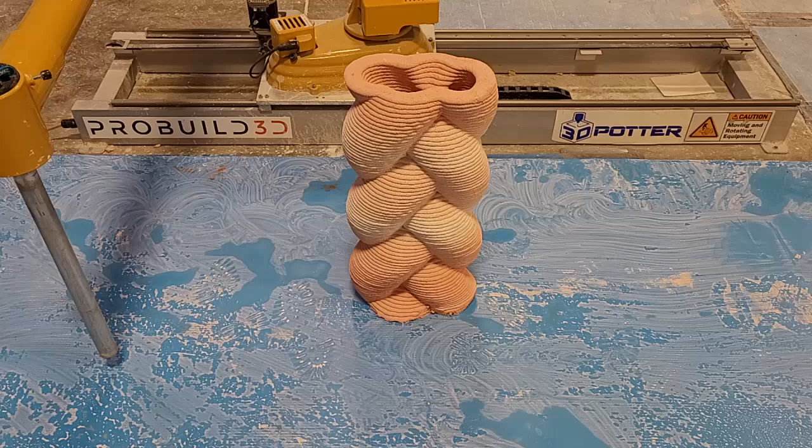Hello. In this video, we will cover how to use starting and ending scripts, as well as pause scripts.

Starting and ending scripts are added in your G-code file, which is made and set by your slicing software, such as Simplify 3D or Cura. Most slicers have the command G28 in the starting script. G28 is the home all command. When this command is run on 3D Potter SCARA printers, the printer will make a 360-degree rotation spin.

If you have hoses or other equipment attached to the printer, this may not be desired behavior. The solution is to remove G28 from your starting script. This will have the printer start the print file right away and not perform a home all maneuver. However, the printer still must be homed before the print file is started.

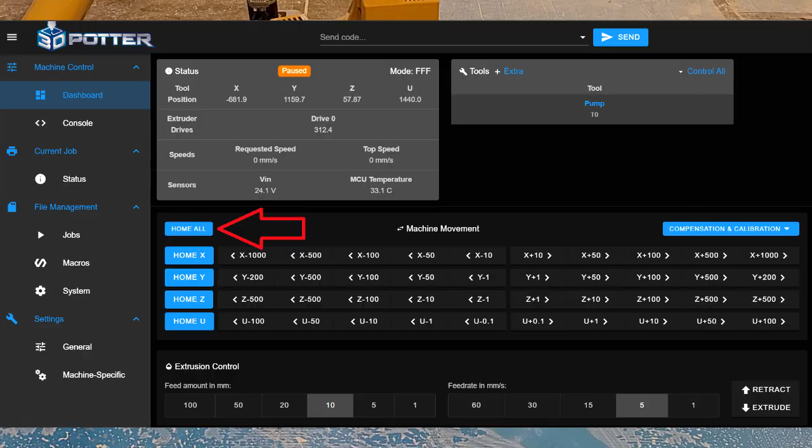To do this, turn the printer on and press the Home All button on the main dashboard. You can then start the print file when you would like to at a later time, such as after attaching hoses or an auger system to the distal arm.

Here on screen, we are selecting a print file and starting it. Since G28 is commented out, the printer does not perform a home all maneuver. The print file starts right away. The nozzle is moving to the first line of G-code using absolute positioning.

It is important to understand the difference between absolute positioning and relative positioning. G-code files normally run in absolute positioning mode, which is set by the command G90. While in the absolute position mode of G90, the printer goes to directed coordinates from the G-code file.

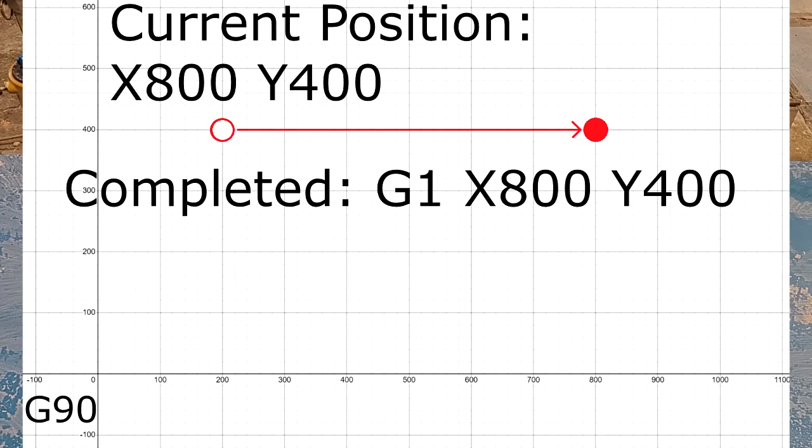Here is an example. Let's say that the print head is currently at X200 and Y400. The next line in the G-code file says G1, X800, Y400. Because we are in the normal absolute position mode, the new head position is now X800, Y400. This is how a normal G-code file works. It has line after line, each telling the printer a coordinate position to go to.

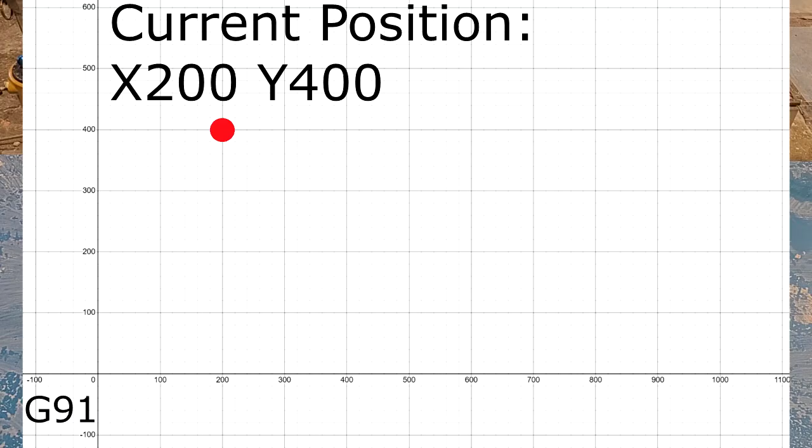Now we will talk about the pause file. Generally, the pause file uses G91, which is relative mode. Same as the previous example, let's start with the print head at X200, Y400. In the pause file, we have the following lines of G-code: G91, G1 X800, G90. This changes the mode to relative, performs a move of X plus 800, and then changes the mode back to absolute position.

Relative mode defines the type of move. The printer will move a distance relative to its current location. When these lines are executed, the head position will end up at X1000. It has moved plus 800 distance from its current location. It is not at coordinate X800.

This is very useful for pausing a print. You can manually set what this pause script does, be it a positive or negative move command in the X or Y axis. Now, let's see a real-world example of a pause script running.

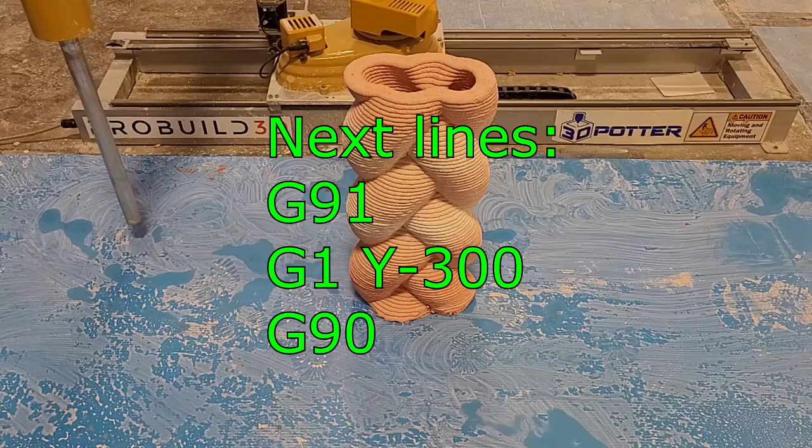In about 5 seconds from now, when the green text changes to yellow, the following pause script will run. As you can see, the head position approached the camera when the pause file was run, as that is what is programmed in the pause file.

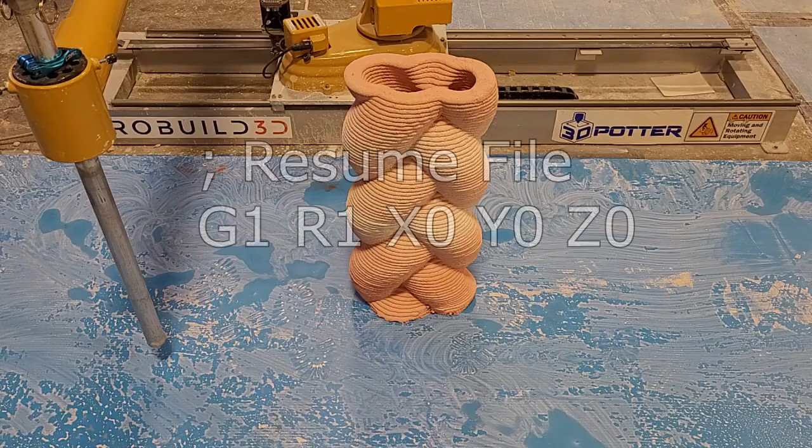The resume file is run when you press the resume print button. On screen now is the default resume command. It instructs the printer to go back to the last run command from the G-code file and then resume the print. This file is also customizable.

Now for the ending script, which is set in your slicing software. If you put nothing in the ending script, the head position freezes in place at the end of a print. This may not be desired behavior if you are running a cement pump or other equipment. We recommend you add something to the ending script, such as something similar to the pause script.

For all scripts and files, you must ensure you do not violate the boundary of the available print area. The printer will try to go to the user's requested coordinate position, be it from your G-code file or from your pause script move.

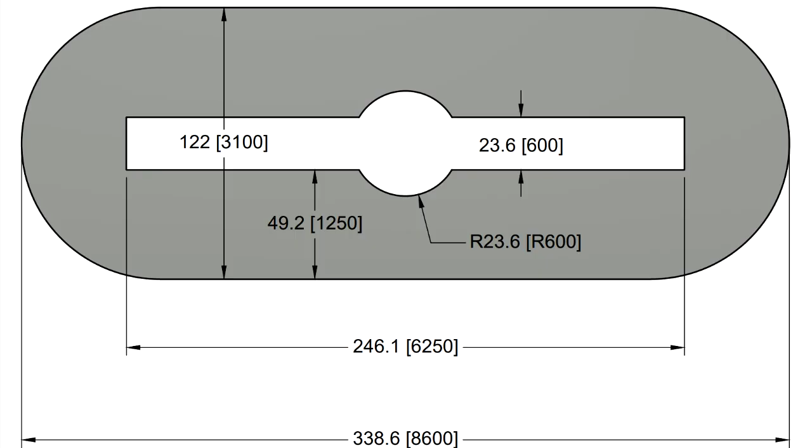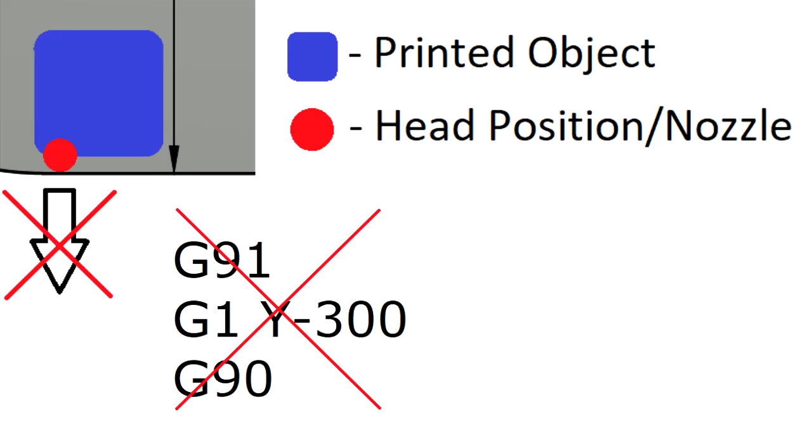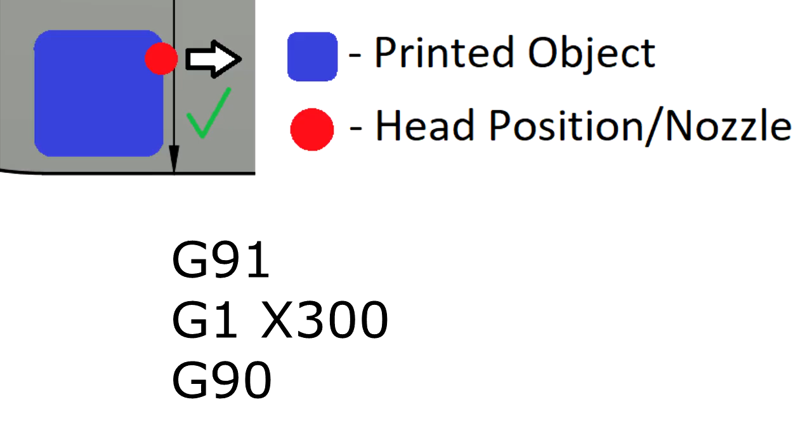One possible solution is to have the print end with the head position in a different location, as well as changing the ending and/or pause script. As shown here, there is available room in the positive X direction, so the ending and pause scripts should reflect this. Make sure that when placing your objects in the slicer, you are using the correct profile that shows the available print area. You can also use the STL files available on our website that directly show the print area. Now, let's see a real-world example.

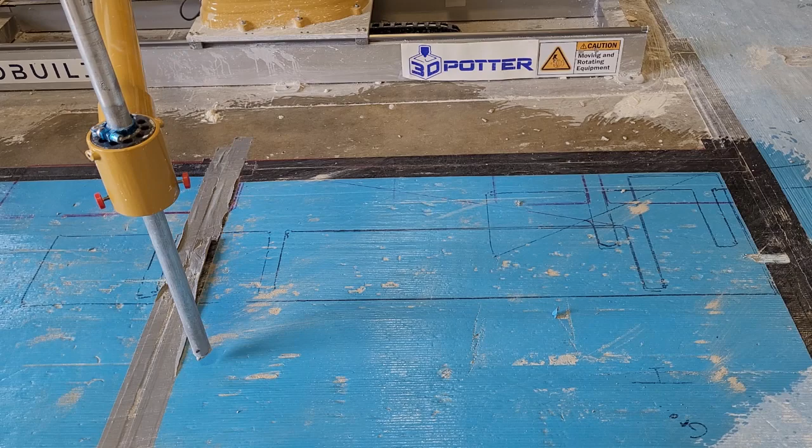We are going to print 3 objects. Object 1 has a starting and ending script. Object 2 has no starting or ending scripts. Object 3 does have a starting script and a fancy ending script that goes in between all of the objects.

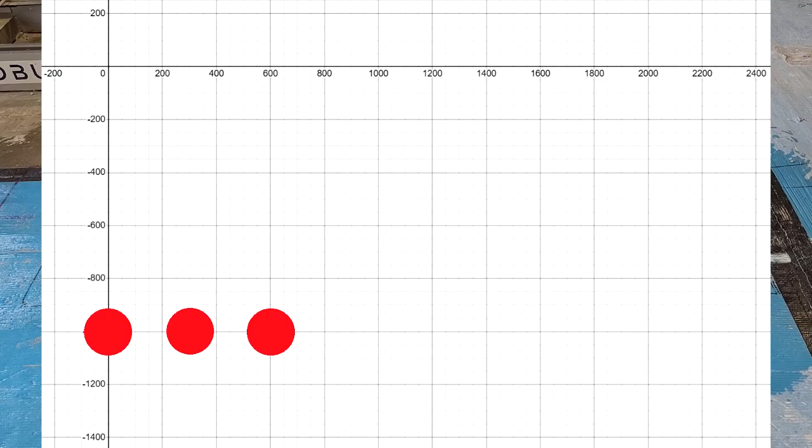This is the coordinate location of the 3 objects we will be printing. As you can see, the leftmost object is at x0, y -1000. The starting scripts will have the head position approach the object from a distance of 300 millimeters away.

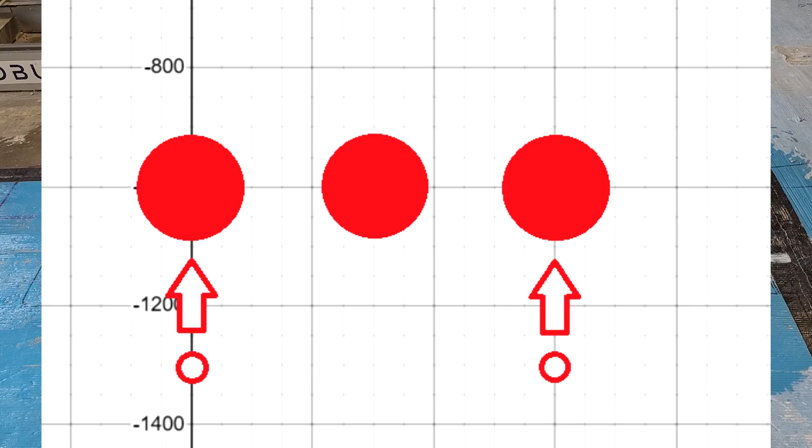Let's start the first object. Right away, the starting script is running. The head position moves to 300 millimeters away from the object, and then the entire G-code file is ran. At the end of the file, the ending script is ran. This will move the head position away from the print.

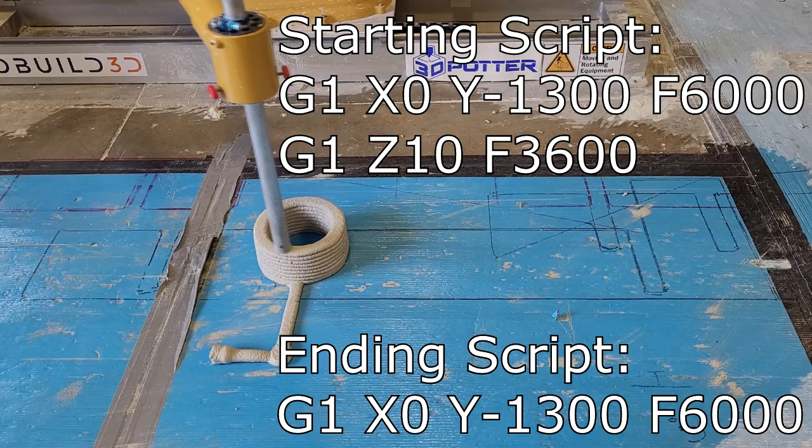As you can see, the same line of G-code is in the starting and ending script. Since there are no Z movement commands, the head position does not change height from its last position. For all 3 of these object prints, we will not be turning off the extruder pump. This will be showcasing a real-world error on Object 2, which has no ending or starting scripts programmed.

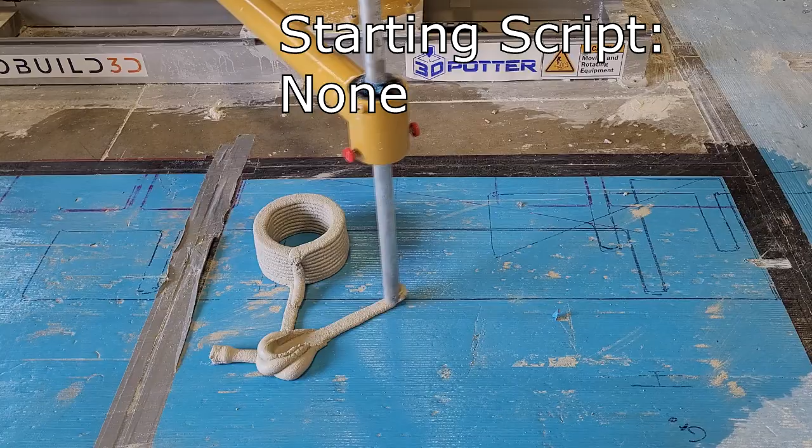Object 1 finishes, and the ending script is ran to move the head position out of the way. We are now selecting Object 2 to start printing. There is no starting script, so the head position makes the most direct line to the start of the G-code file. If this is done, it may crash into something or even the Roadrunner track itself.

You must always be aware of the nozzle travel path. The printer will go exactly where you tell it to go in your G-code file. If you tell it to crash the nozzle into the rail, it will execute what it is told to do. The G-code file is ending, and with no ending script, the head position freezes in place, ruining the print. This is why we recommend using an ending script.

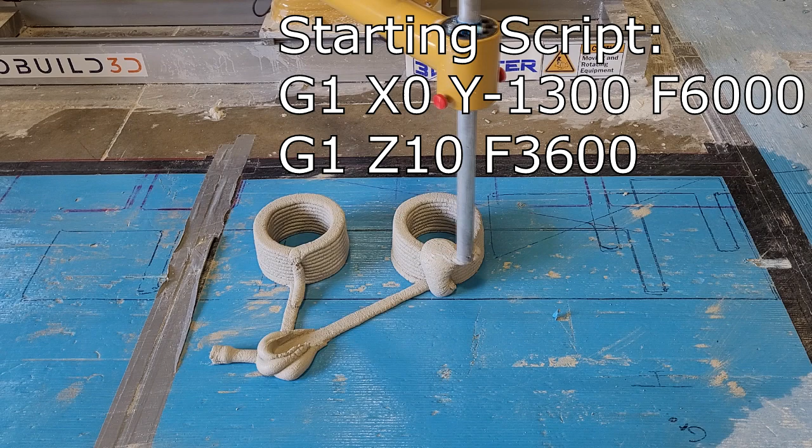Object 3 has now been selected to print. It is using the same starting script as Object 1. Just like with the start of Object 2, the head position takes the most direct route to the next line of G-code. In this case, it is the starting script location of Object 3.

All of these starting and ending scripts used absolute positioning, G90. If you wish to do so, you can use relative positioning for the ending script, G91, which is also used in the pause file. Now we will run the longer ending script, which goes in between the objects.

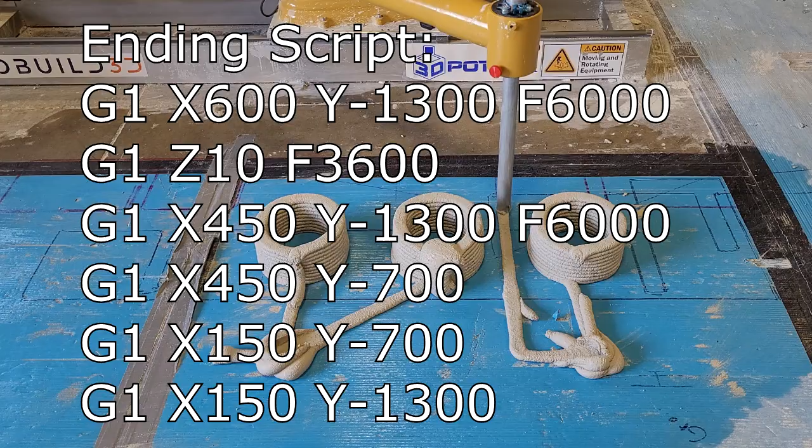Writing more lines of G-code in the starting or ending scripts gives you direct control over the head position's travel path. This can allow you to go around obstacles such as already printed objects or the Roadrunner track. Here is a visualization of the ending script.

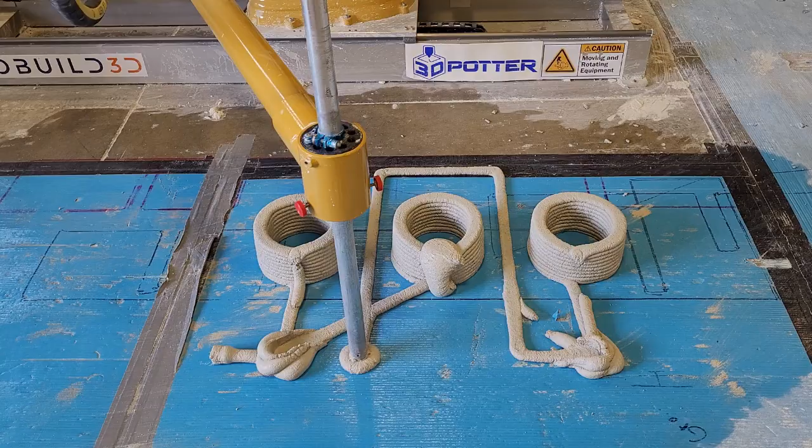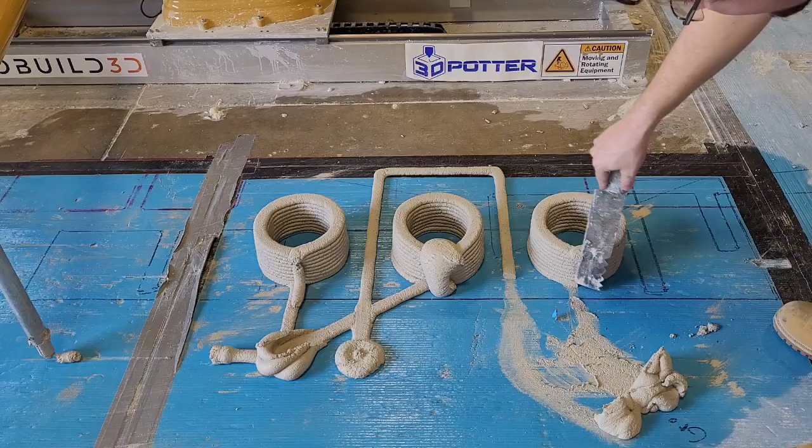After the print is done, you can remove the starting script line, as well as any extra extrusions that occurred at the end of the print. Depending on whether or not you are using spiral mode, the first layer may have over-extruded. You can trim around the base of the object if needed.